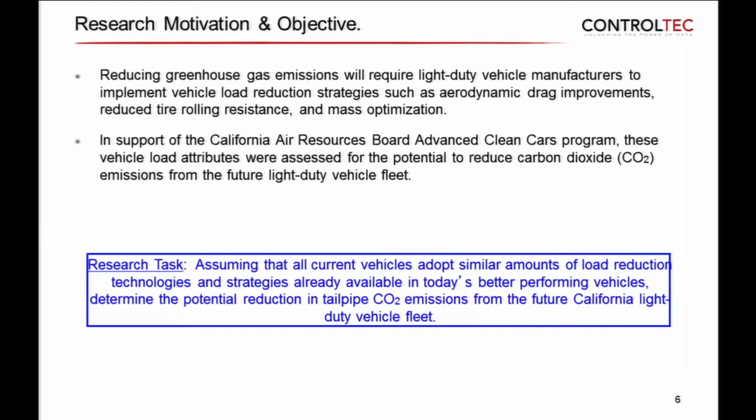Just want to touch on the scope, because this comes up a lot, what the scope is and is not. It is focused on 2014 model year light-duty vehicles to set the baseline. It is about aerodynamic drag, tire rolling resistance, and mass. We're focused on the EPA combined cycle, so that's 55 city, 45 highway, and it's an analytical study.

What it is not is we're not getting into powertrain technology with this research. We're not looking at alternate drive cycles, NEDC, which is the European, JC08, Japanese, and WLTC, for instance. We did not do any testing here. We evaluated test data, but did not actually do any tests, and it does not include a cost assessment.

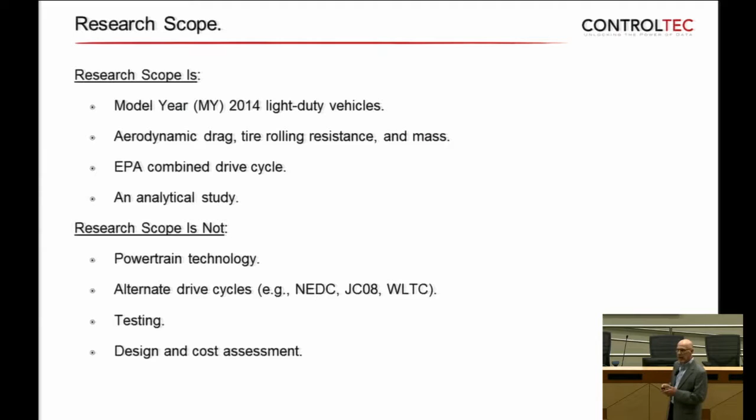So we're going to start out with a vehicle load primer, just to level set individuals on what we're talking about. When we look at vehicle load, or when we look at CO2 emissions, we look at it from an organizational viewpoint, where there's an organization that handles vehicle load, and there's an organization for energy conversion efficiency. Under the vehicle load elements, you have what we call road load, mass, and then drive cycles as part of that.

Under road load, aerodynamic drag, tire rolling resistance, brake and hub drag. And under mass, it's the weight of the vehicle plus inertia. And of course, drive cycles play an important part on the importance of vehicle load.

On the energy conversion efficiency side, that's really the powertrain elements, as most would call it. We're not going to talk about those today. We're going to talk about the items highlighted in green and orange.

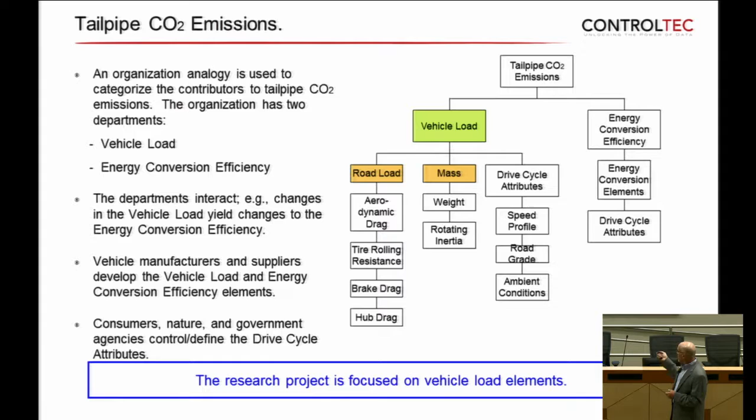This organization chart happens to be a way a lot of manufacturers also organize. You have vehicle energy folks that worry about aerodynamics, tires and aero, and you have the powertrain folks that worry about the energy conversion efficiency.

Drive cycles are defined by folks like some of you in the room, regulatory agencies, consumer, and of course nature, and that is a very important aspect of vehicle load.

Just to frame vehicle load and its importance, this chart shows all 1,300 vehicles, 2014, on the EPA cycle, fuel consumed as a function of tractive energy. So the best measure of vehicle load is tractive energy. And tractive energy is that combination of aero, mass, tire.

And you can see in this example, and this is true for every model year, about 70% of the variation in fuel consumption among all the vehicles that are sold new is due to vehicle load, variations in vehicle load. So along the x-axis...

Here is tractive energy, and I pointed out a couple cars here. This first car is a Mitsubishi Mirage, very small car if you're familiar with it, 3-cylinder engine. And then I'm going to go to the other end of the spectrum and look at a Lincoln Navigator. Very large vehicle, has a different function, handles more people, tows.

But what you see there is, if we look at the fuel consumption units there and compare the two vehicles, there's about a 3 times difference in fuel consumption. You go from about 1.5, in this case I'm looking at energy per mile, up to about 4.5. So it's about 3 times the fuel energy. The tractive energy on the x-axis here is also about 3 times.

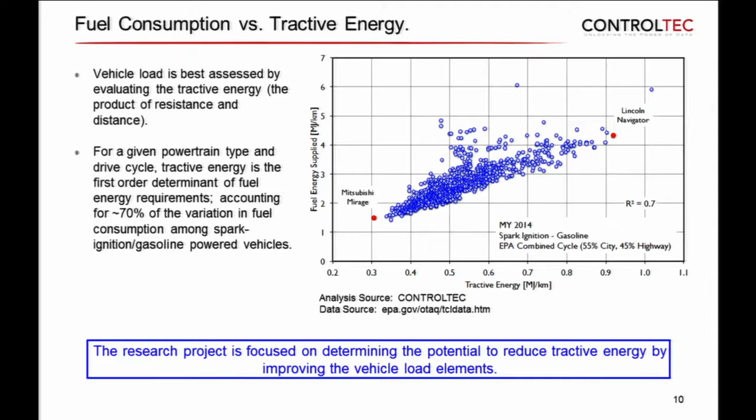Now, in this organization that we're talking with, we care about CO2. So CO2 is a simple conversion when we're talking about gasoline, not electric, for this example. It's a simple conversion of that y-axis on the previous chart, and now I'm putting it into grams per kilometer CO2.

Same trend here. The Mitsubishi Mirage is about 110 grams per kilometer in this example. The Lincoln Navigator is up around 320. 3 times the tractive load, 3 times the CO2, for the same efficiency.

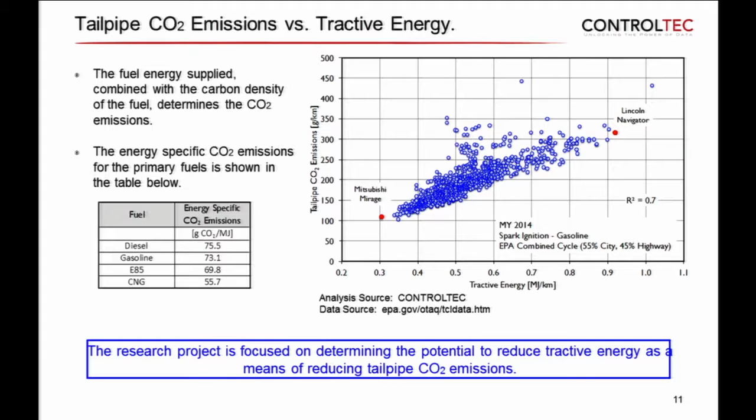Some may ask, what about the scatter here? Vertically, the scatter is due to efficiency. The difference between a car down here being very efficient and a car up here being inefficient, that difference in CO2 is due to the efficiency of the energy conversion elements. So we're looking specifically in this research at what is the impact of tractive energy, or vehicle load, on CO2 emissions.

Now the importance, as I said earlier, drive cycle is important in terms of its vehicle load impact and the elements themselves. So people say, how important is aerodynamics, or how important is mass, or how important is tire? It depends on how the car is driven.

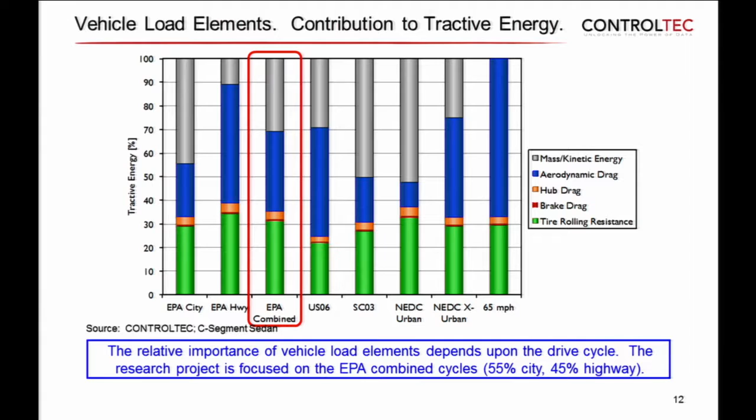We're going to be focused on everything we're going to talk about today. We're going to be focused on the EPA combined cycles.

So how important are these for what we're talking about today? We've analyzed lots of cars, done lots of analysis in the past, and the numbers we use across a wide range of vehicles would be: for the EPA combined cycle, a 10% reduction in mass would be a 5.6% reduction in tractive energy. A 10% reduction in aerodynamic drag would be a 3.6% reduction in tractive energy. And a 10% reduction in tire rolling resistance would be a 2.1% reduction.

So the point of this is you do not get a one-for-one impact on tractive energy. Meaning if I reduce my mass by 10%, I'm not going to get 10% better fuel economy. I'm going to get 5.6% or less, depending upon powertrain matching. And again, as I said earlier, mass impacts both tire rolling resistance and overcoming kinetic energy.

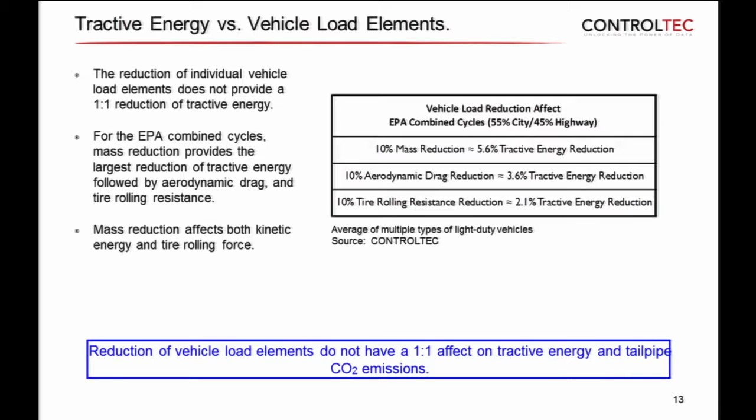So let's walk through the assessment of the model year 2014 vehicles. Again, the question from the ARB team was, what if everybody moves to the best in class? What's going to be the impact on CO2 and fuel consumption? So the first thing we have to do is figure out where everybody is.

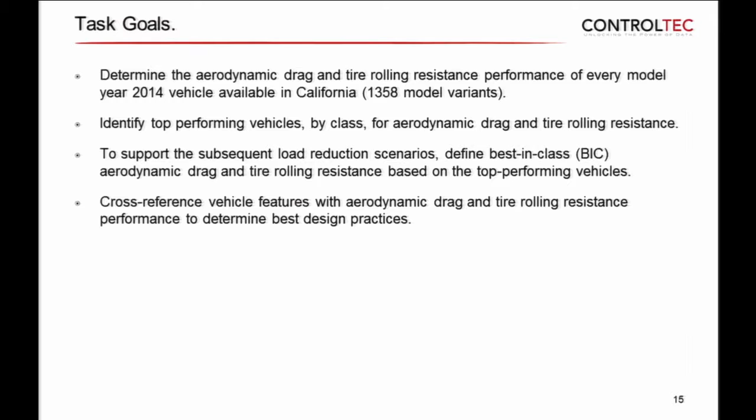So the task goal here, in this particular non-mass task, is to find out what levels of aerodynamic drag and tire rolling resistance every model year vehicle and every variant in the fleet has, which we counted up to 1,358 variants. So what is a variant?

This is very important to understand as we go forward. A variant is a body style powertrain combination. So if we think about a pickup truck, which is the most complex variant, most pickup trucks will have 3 cab sizes and 3 bed sizes, and most will have a 2-wheel drive and a 4-wheel drive, and most will have 1 or 2 or more engines in them.

So if I use an example of, say, a Chevrolet Silverado, by our count, Chevrolet Silverado is 52 variants. We needed to understand the aerodynamic drag and tire rolling resistance of all those. If you think about another car, a Ford Fiesta, it's a sedan and a hatchback - that's a different variant. So often if you go into the EPA database and look at the labels, there's fewer variants than 1,358 because labels are done collectively. Pickup trucks have a single label for a powertrain.

Once we figured out the aerodynamic drag and tire rolling resistance of every vehicle, we needed to identify top performers, and then define best in class, because best in class can have a broad definition.

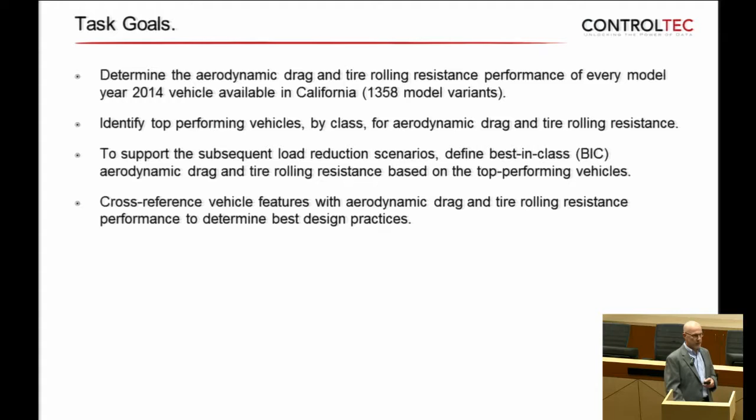For aerodynamic drag, the best measure of what we're talking about here is the coefficient of drag, or C sub D, and it was reported by about 47% of the manufacturers. So of the 1,358 variants, we had about 700 reported CD variants. And quite frankly, of those 700, some of them were the same value for a range of vehicles within that. So there might be a pickup truck that had multiple body styles, but there was one aerodynamic drag number. We knew that that's not technically correct.

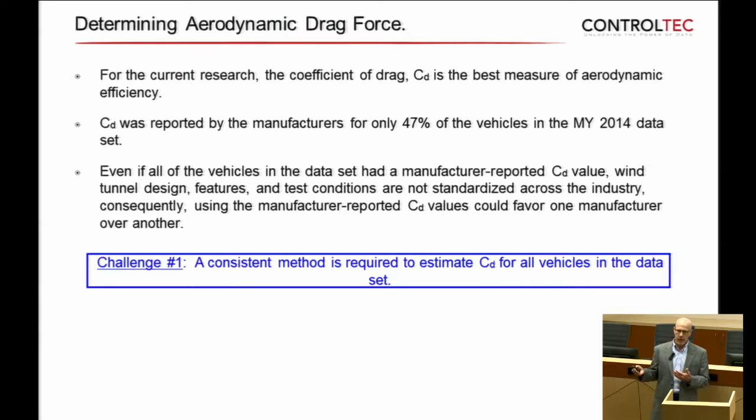But even if every manufacturer reported 100% of aerodynamic drag, test standards are not the same from wind tunnel to wind tunnel. Most aerodynamic drag numbers are measured in a static wind tunnel, and those will vary. There's enough technical papers out there to indicate that. So we had two problems here: we knew there's variation in the measurement, and we did not have measurements for every vehicle. So challenge number one for this research was to find a consistent method to estimate the coefficient of drag for all the vehicles in the data set.

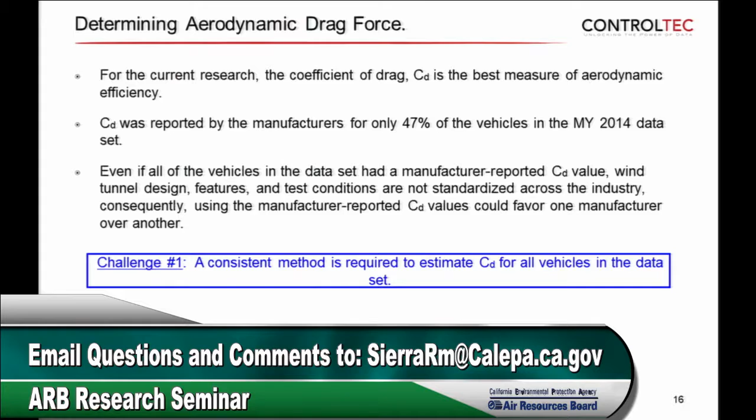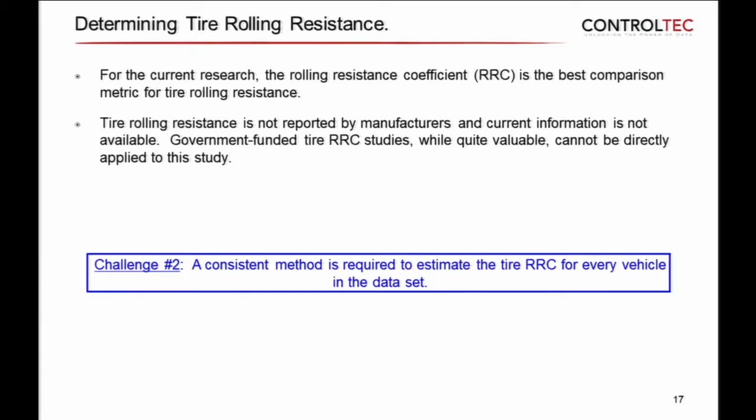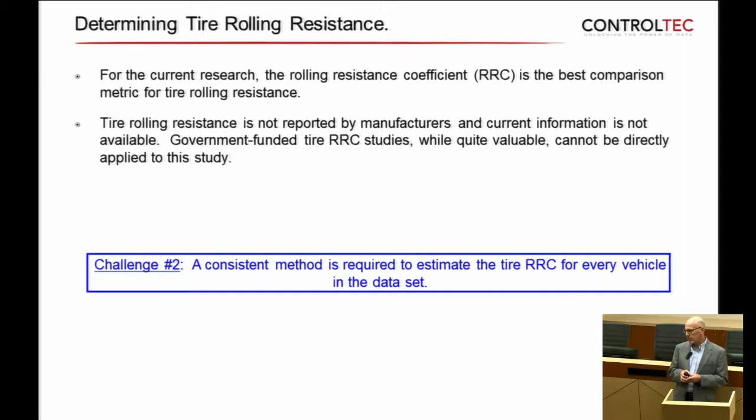Next came tire rolling resistance, and RRC, or the rolling resistance coefficient, which is a common value used in industry, is, we felt, the best comparison in this case. Tire rolling resistance as a numeric value is not reported by the manufacturers, nor could we find much information in literature from the tire manufacturers themselves. So very little information on tire that we could find to support this. There are some government funded programs from a few years back. We'll go through that. But our challenge number two here was to find a consistent method of measuring, or estimating, tire rolling resistance for each of the vehicles in the data set. So how did we do that?

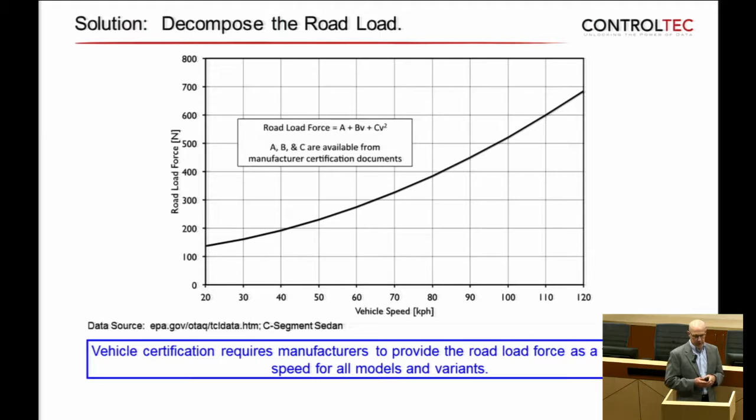So we took this method, decomposed 1,358 vehicles down, and now we'll walk through the results of these.

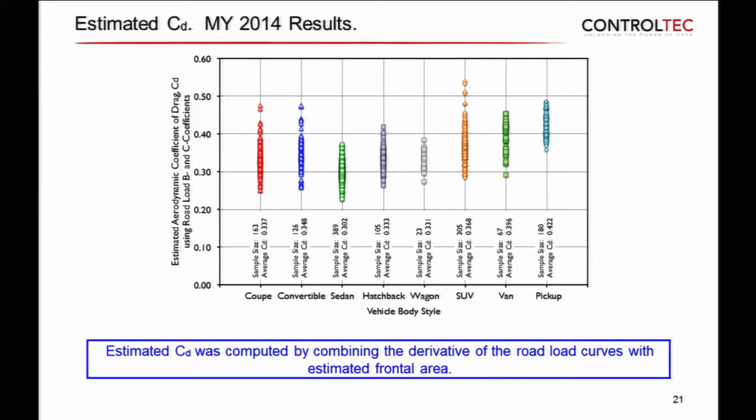Things followed trends. Over here on the coupe and convertible, you see those ones sticking out. Those tend to be the performance vehicles. Performance vehicles, if they don't use an active device, need something to pull the car down to the road at high speed to avoid lift. Those are often detrimental to the coefficient of drag.

So as we went through this and vetted out this information, it all followed well. I don't show it here, but it is in the report. We did correlate it against the 47% of vehicles that reported.

I should say this method measures what we would call the dynamic CD. Most vehicles, when measured for drag in a wind tunnel, it's static, meaning the tires are not turning and the road is not moving. There are wind tunnels in the world that have moving roads and spinning tires, but most do not. So what we're analyzing here, because we're decomposing it from a road load, which is theoretically from a coast down, which has moving road and rotating tires, will have a higher CD on average, and that's what we saw.

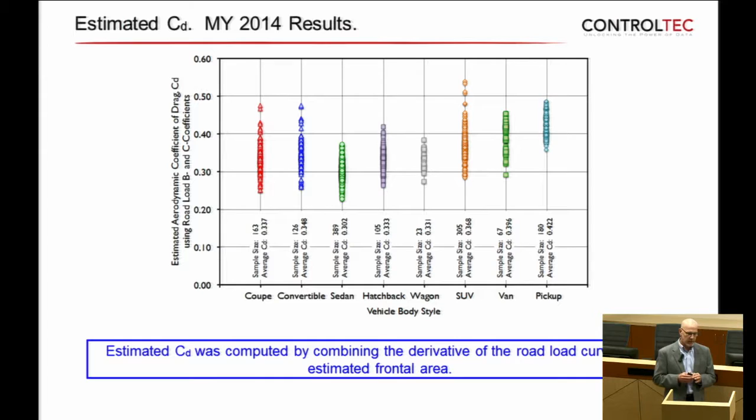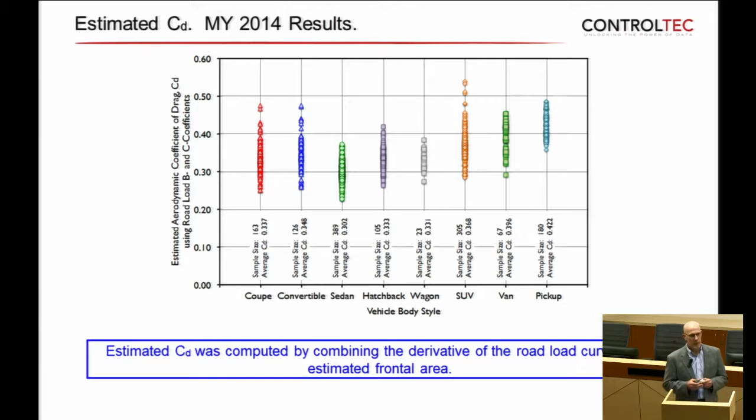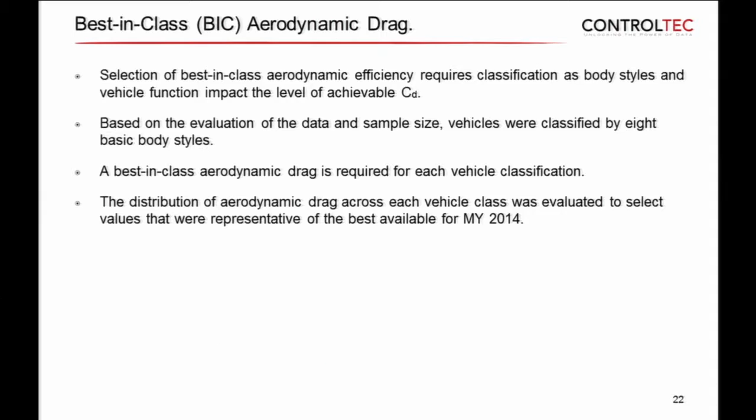So to satisfy this research, we had to select best-in-class aerodynamics. We knew, as you can see from that previous slide, that aerodynamic drag is variable by body style, so minimally we had to have a classification that recognized that. We didn't want to come to the end of the research and say that a pickup truck has to have the same aerodynamic drag as a sedan, because we knew that's not plausible or logical. So we did want to classify these to identify best in class.

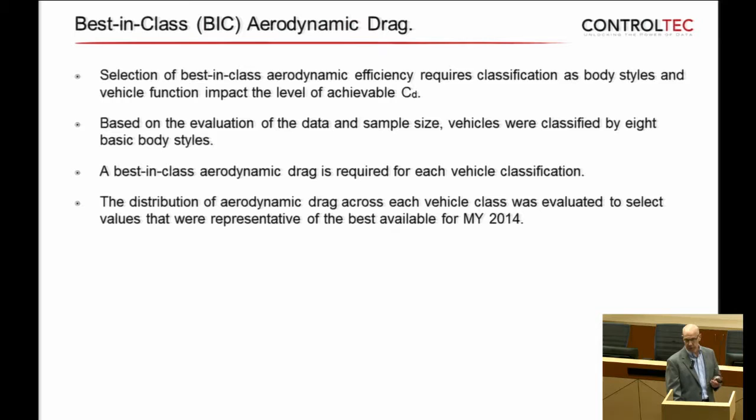We looked at sample sizes, we looked at a lot of data, we looked at distributions, and we came up with 8 different body style classifications to put each vehicle into a class and then define the best in that class. We looked at distributions across each of those and made our evaluations and proposals, presented those to the ARB Air Resources Board team, vetted back and forth a bit, and in recognition of the body style variance and measurement and analysis variability inherent in this, we defined best in class as the 90th percentile.

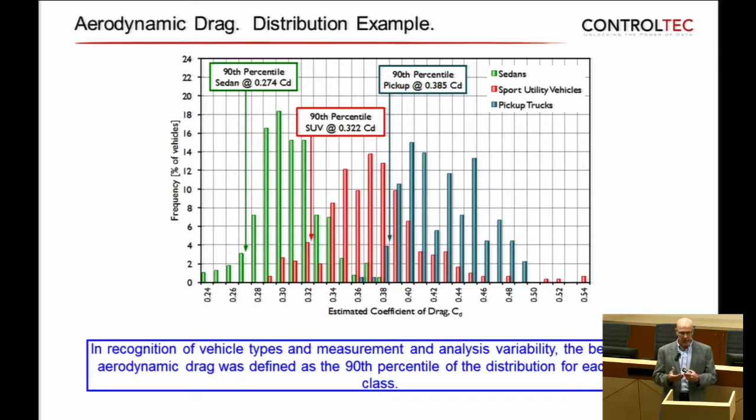SUVs varied, as I said earlier, the widest variation from just around 0.33 CD all the way up to near 0.55. The 90th percentile there being 0.322 by our measure. And the pickup trucks are more narrow because they're more common with each other, about 0.385 is best in class by our measure.

So 90th percentile is the definition of best in class. Going back to what we were going to talk about earlier, we're moving everybody eventually, once we get down to this scenario, to move all these cars that are not best in class to best in class. So these vehicles out here would move down to that level. Vehicles that are better than best in class for the final load scenario, we left them there. They were already best in class or better. We did not want to, and that's the team, the ARB team and ourselves, task a best-in-class vehicle with getting even better.

Just bring the industry up.

So these are the final results of our analysis of the 8 classifications: coupe, convertible, sedan, hatch and wagon. We lumped hatch and wagon together for a couple of reasons. When we looked at the data and the distributions, there wasn't a significant separation in aerodynamic drag for hatch and wagon, and the wagon segment is pretty small, less than 20 vehicles. So we lumped those together.

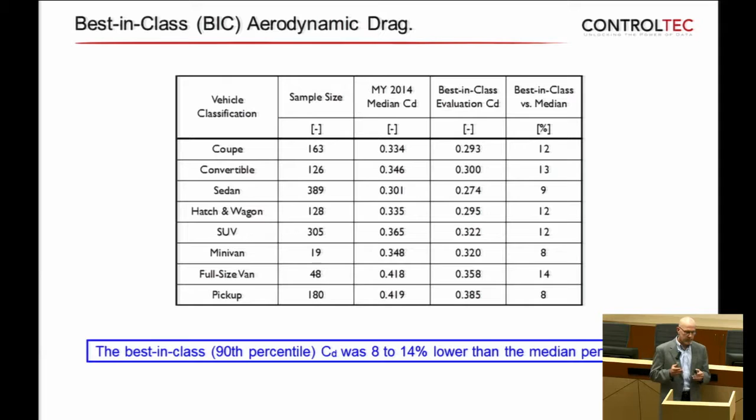Overall, what we're seeing here from an aerodynamic drag standpoint, relative to the median shown in the middle column, is an 8 to 14% reduction from median today to best in class today, depending upon the class of vehicle. So remember that number when we get down to the load scenarios.

So let's go to tire rolling resistance next. I'm going to jump right to the result. This is the distribution of tire rolling resistance that we found after looking at the 1,358 vehicles. We have tire RRC - the units there are kilograms per 1,000 kilograms, or in English units, pound force per 1,000 pound force. We're seeing anywhere from about low 6s, high 5s, out to about 16 RRC.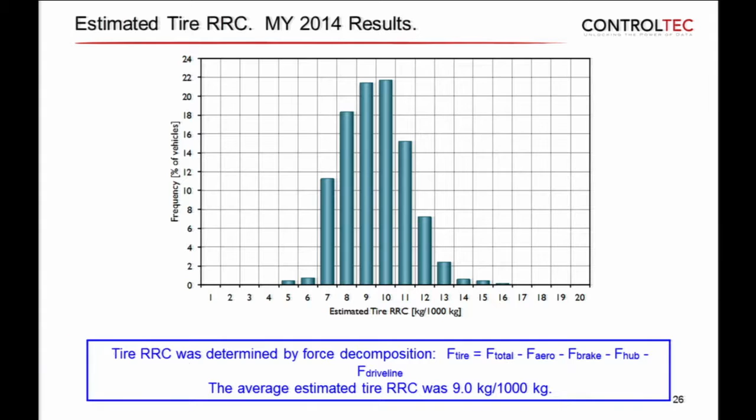Now, unlike aerodynamics, we did not have a baseline to compare to, because in aerodynamics the CD is reported by manufacturers, so at least we had a reference point. In the case of tires, we had no reference point because it is not reported in the literature. We did go back to look at how our distribution compares to a study of original equipment tires - we had to go back to 2009. As part of some studies, the Rubber Manufacturers Association put together a series of about 400 to 500 original equipment tires, and their distribution is plotted in green against our distribution in blue.

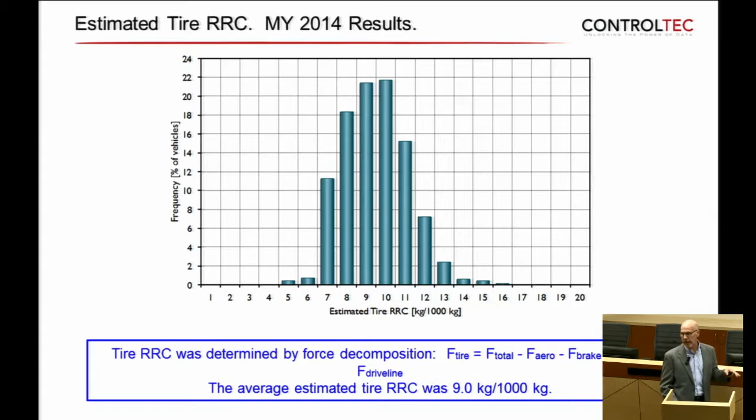So there are differences, but we are close on average. Our average in the 2014 fleet is 9 kilograms per 1,000 kilograms. The RMA data was at 9.2 kilograms per 1,000 kilograms. There are some differences in the distribution - we are estimating more activity down in the 7 and 8 RRC range, and more activity out in the high RRC range, although the median of the two distributions is very close.

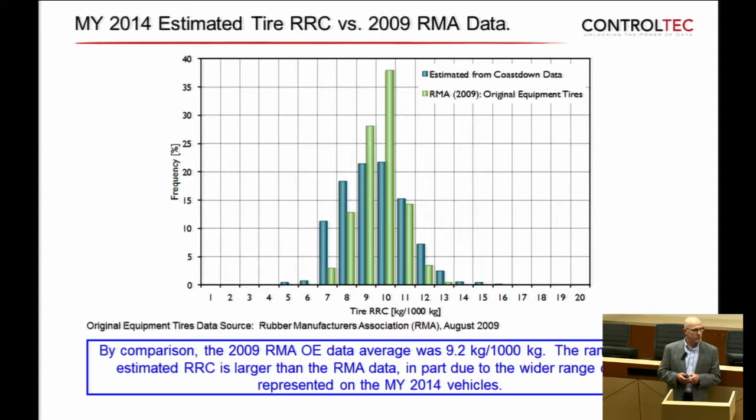Why would we expect to see that? A couple things: that data from RMA is 6, maybe 7 years old now. We don't know what has happened with tire rolling resistance in that time. The RMA data may have been off new tires rather than run-in tires, which is part of the coast down procedure. And the tire size, wheel size, and tire width of the RMA data was much narrower than in 2014 - a lot more tire variety in the blue set versus the green set. But by comparing it against the RMA data, we at least got some comfort that our analysis methodology was consistent with what has been measured in the past.

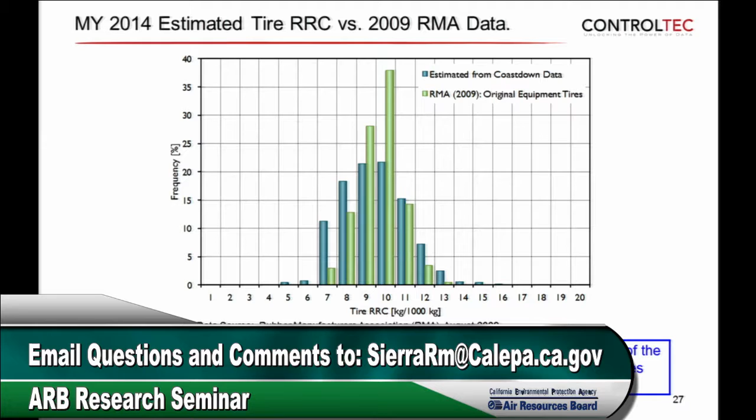So again, as with aerodynamic drag, we needed to understand best in class. But just like with aerodynamic drag, we know tires have other things they have to do. We have to be cognizant of wear, braking, wet traction, noise, other things. So we evaluated, based on some vehicle classifications, different categorizations of tires. We came down to 3 categorizations of tires.

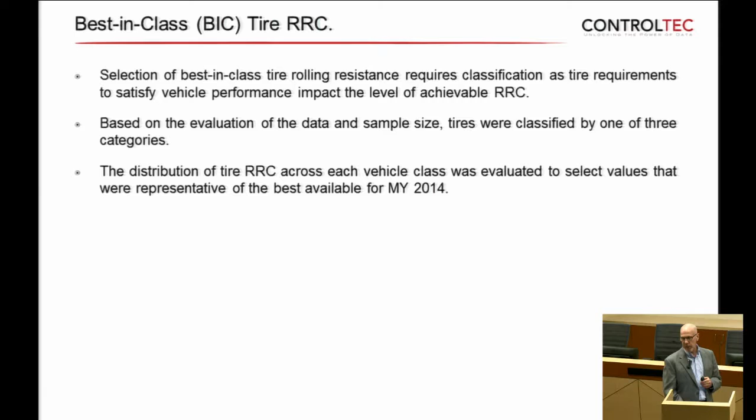So let me explain each of these classes. If a vehicle was specifically a fuel economy oriented vehicle, or it was the fuel economy oriented model within a vehicle, it got binned into the fuel economy class. And that doesn't have to only be small sedans like Toyota Priuses - the Silverado XFE, a fuel economy version of that truck, can go into that class. Or if the manufacturer specifically said in their write-up that it was a fuel economy tire on the vehicle, we put it into that class.

For the performance class, it was really if it was a performance-oriented car, and we classified those tires, or those vehicles, into the tire classification of performance. Those are all the vehicles that we would expect - the performance cars from Europe, the performance versions of cars, SRT for Chrysler, Corvette for GM, those kinds of cars that we would all agree are performance cars, got binned into the red.

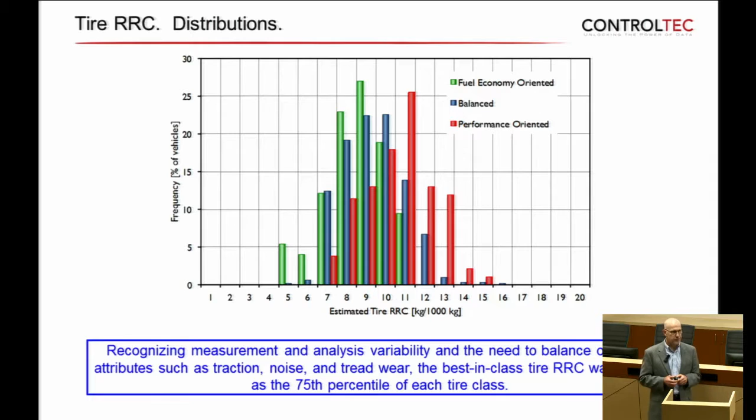So as with aerodynamics, when we get to the end, if we had the car in the fuel economy class, its tires would get moved to 7.4. If it was already at a 6, its tires are not going to get moved. So we're moving all the tires above 7.4 in the fuel economy class to that value. Balance is 7.7, performance is 8.9. Overall, compared to the median, we're 11 to 14% lower rolling resistance for a best-in-class tire versus a median tire.

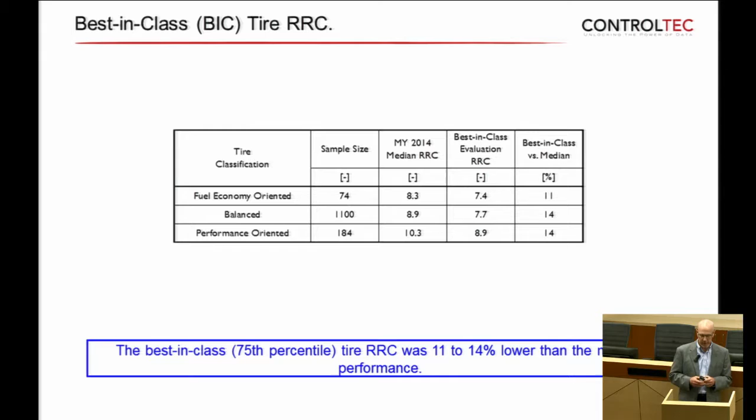So that's aerodynamics and tire rolling resistance. Now we have to get into mass. Mass is difficult.

So the task from the ARB team was to generate a metric for mass, to quantify mass efficiency. And then once we quantified that, determine the mass efficiency of the 1,358 vehicles, identify the top vehicles, just like we did with aero and tire, and then again define that best in class. Because we're not always saying, as with tire and aero, the best in class is the absolute lowest value - it's a logical value that we believe is plausible and probably achievable.

And then cross-reference that with vehicle features. The last point was part of the literature review, and relative to the literature review, some manufacturers report a lot of information on mass and mass usage. Other manufacturers don't report anything. So that part was certainly somewhat difficult.

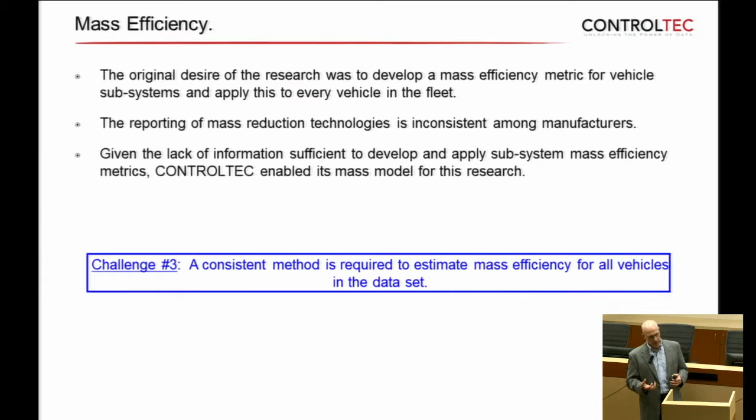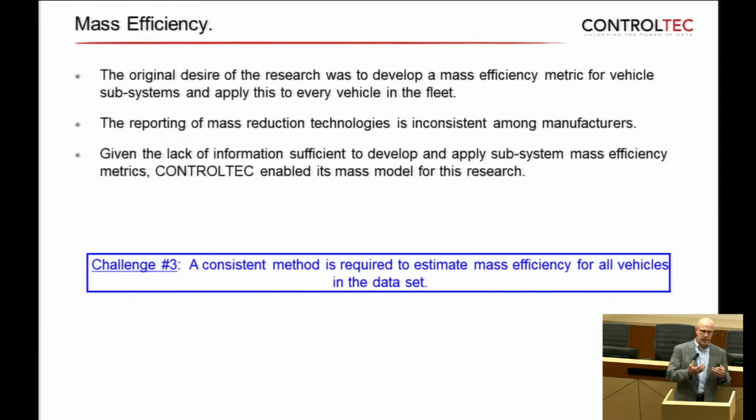So the original desire was to look at the subsystems of the vehicle, body in white, powertrain, and try to do some kind of substitution analysis where we pull off an all-steel body in white and put on aluminum, or take off a steel door and put on an aluminum door. There was not enough consistent information out there to do that, so we had to come up with another method. Given that lack of information, we already had a mass efficiency model developed that we had done for some of our other work, so we leveraged that mass model.

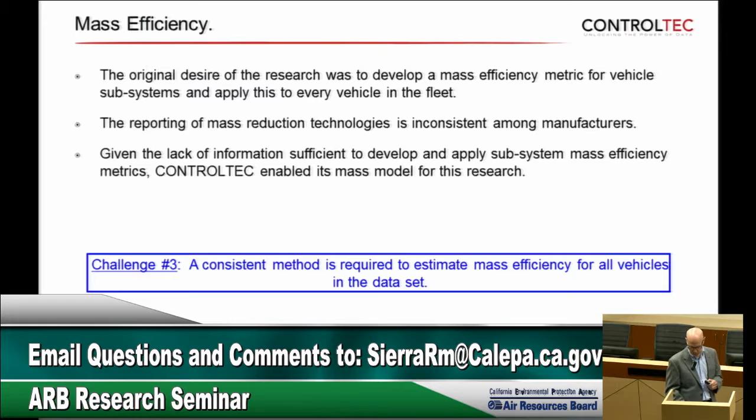So let's talk about that mass model a little bit. It's a light-duty mass model that we've assembled over the last 4 years or so. We use it to identify vehicles that have good mass efficiency or vehicles that have opportunity for mass reduction.

We use publicly available information, because if you've got to populate this and check out a vehicle, and there's 1,300 of them, you have to really rely on the public information from the manufacturer.

The model is a combination of continuous and discrete elements, and it's assembled like the car itself. There's the base vehicle portion that takes into account the length, width, height, cargo bed, wheel size. There's the powertrain portion that takes into account what type of engine it is, spark ignition, compression ignition, is it turbo, non-turbo, supercharged? If it's a hybrid, what kind of hybrid is it? What's the size of the motor if it's a hybrid?

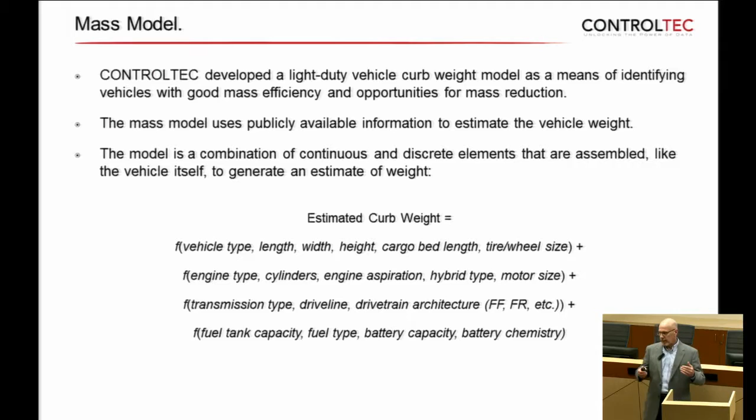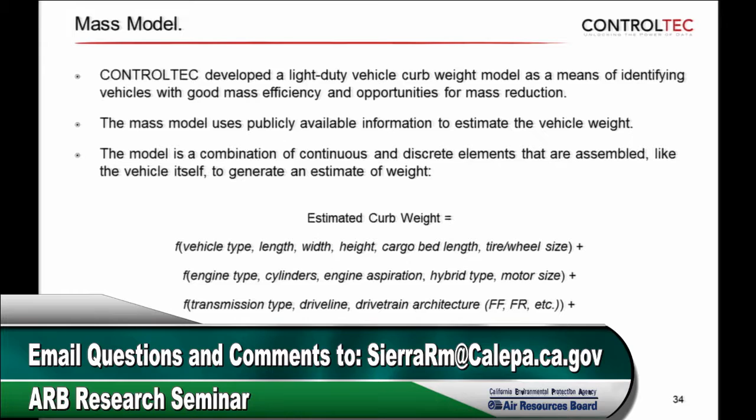Also then the next discrete element is the transmission and driveline. What's the transmission type? What driveline? What's the driveline architecture? And then finally the onboard energy storage element, which is fuel capacity, fuel type, battery capacity, and battery chemistry. So we take the publicly available information, load it in the model, and it projects a weight for that vehicle.

So the output of that model I'm showing here is the estimated curb weight against the manufacturer reported curb weight. We're about a 95 R-squared, so we account for 95% of the variation in the fleet. But we do see variation, obviously. And that variation is things we didn't put in the model, things we don't know about.

We don't know precisely the material usage on all components of the vehicle. We don't know precisely the option level. So we can start to look at these residuals as a proxy for mass efficiency. So as an example...

I don't know what car that is, but our mass model projected that it was 2,000 kilograms. The car itself was 1,800 kilograms. So to us, the unknowns, which are material usage and option, are part of that mass efficiency. So we would say that that's a mass efficient car.

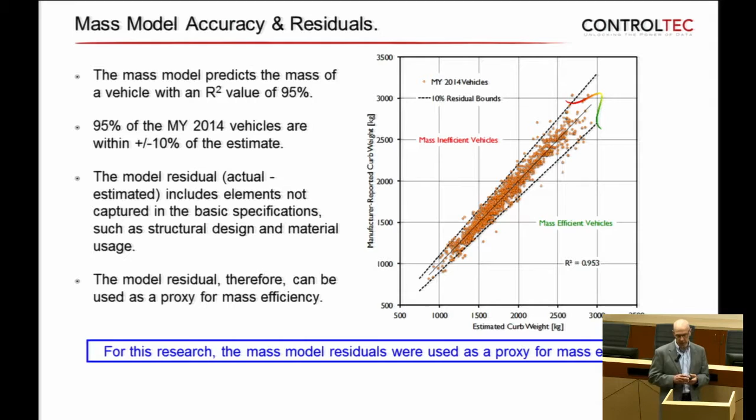If you go on the other end of the spectrum, a car up here, our mass model projected 2,200 kilograms, but the manufacturer said it weighed 2,700 kilograms. So we would say there's something about that car. We've accounted for all the things in that car. We've counted how big it is, the tire size, the engines, it was a hybrid, the mass of the motor and the battery, and it's still 500 kilograms heavier. So there's a mass efficiency element.

So that's what we use the proxy for this study, is the residuals out of the model. The residuals are accounting for everything we know about that car, the unknowns, material use, and option. So there's a distribution around here from mass inefficient to mass efficient vehicles. And we want to look at that distribution.

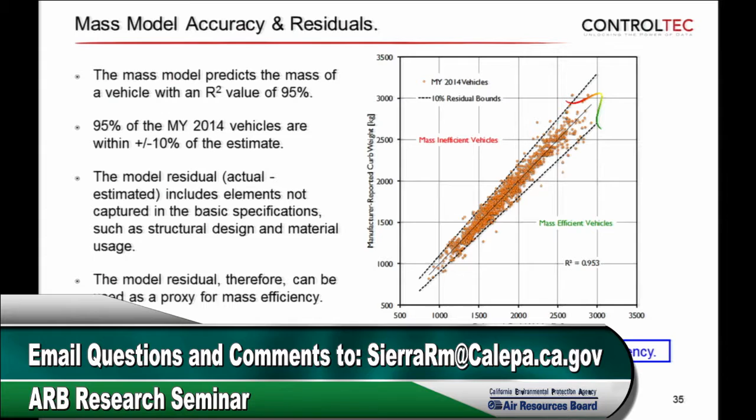We want to see what that looks like, and study vehicles on either side of that. So if I cut across here, basically look at that distribution, this is what that distribution looks like for the 2014 vehicles. So I have this residual, and this would be percent mass above or below. Don't worry about the numbers so much. Anything to the right is going to be less mass efficient, going to the left, more mass efficient. The zero value here really represents what is typical in the fleet today.

So what is typical in the fleet today? Leveraging our literature survey, typical in the fleet is, if we start with the body, it's typical as a steel body. We don't know the percentage of high-strength steel, but we know it's typical as steel body. Closures, doors, hoods - there's a fair number of high-volume vehicles with aluminum closures, fair number of high-volume vehicles with composite lift gates, things like that. So body, steel, closures, some alternative material.

Powertrains tend to be almost all aluminum, at least the blocks and the heads of the engines and the transmission cases. Internals of those remain steel in terms of gears and things like that. Suspension components are typically aluminum now. There's a lot of aluminum use. And so that would be the zero. So as you go to the left, to calibrate ourselves, we want to look at some vehicles that have done something with mass that we know about.

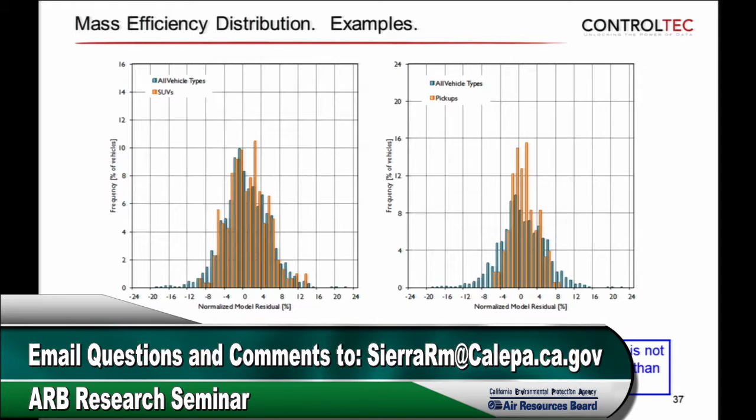So I'm showing here on the left chart all vehicles against just SUVs. You see the distribution is very similar, SUV to all vehicles. On the right, I show pickup trucks to all vehicles. Now pickup trucks, in this case in 2014, have a much narrower distribution, centered around 0 but narrow. That's because it's a very homogeneous group of vehicles in 2014, all primarily steel, basically what I described earlier, steel type vehicles, aluminum closures, aluminum powertrain parts.

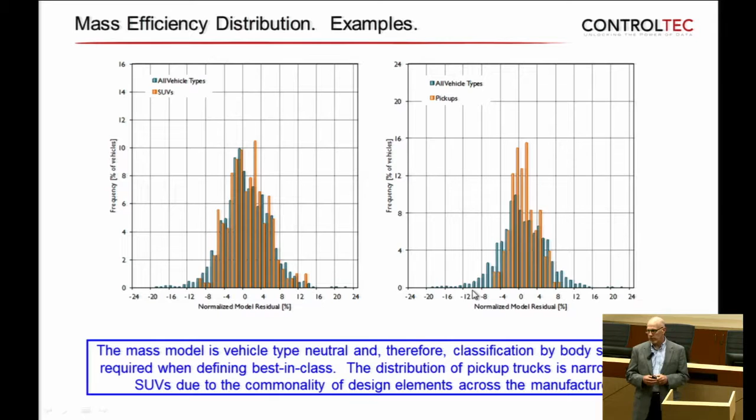The F-150 is not in here for 2015, but just as a reminder, it moves it down to that 11% - that's where the F-150 would be against pickup trucks. So again, we felt that the model itself is vehicle type neutral. It's just that pickup trucks are narrower because they are more homogeneous as a group.

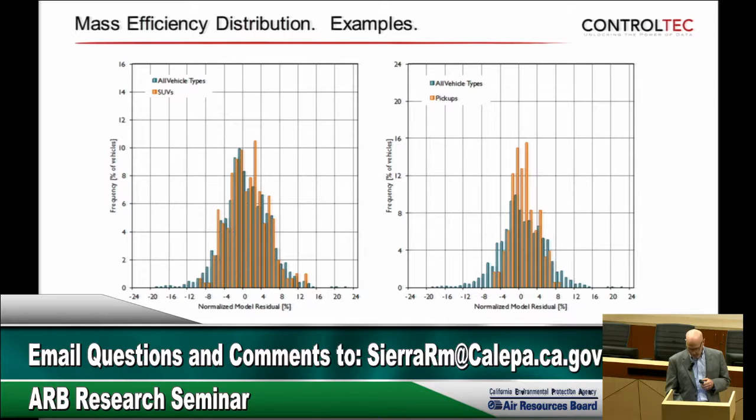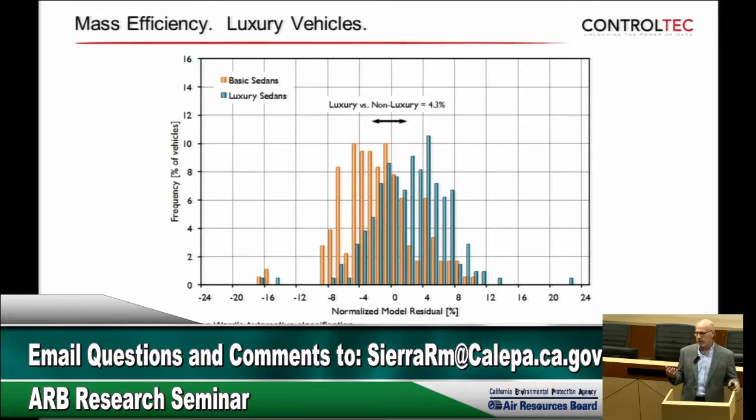Option level was something else we were aware of and can't control, but we did want to look at luxury versus non-luxury. A luxury vehicle in general has a base that's much more heavily optioned than a base vehicle that's non-luxury. Certainly you can option a non-luxury vehicle to have everything, but reported masses are typically on base weights. When we broke apart the vehicle data set by luxury versus non-luxury, in this case showing sedans because it's the largest set, we saw about a 4.3% separation. This also aligned with where some manufacturers report base mass and fully loaded mass, and it tends to be 3 to 4%.

So luxury vehicles, by the definition we used, Ward's Automotive helped classify these vehicles as luxury or not, and it's about a 4% difference. We used that across all luxury vehicles, not just sedans.

So in the end, we had to select best in class mass efficiency, with neutrality of the model as I said. We went with non-luxury and luxury categorization, looked at the distributions, and recognized variability. In the mass world there's less variability, since weight is easier to measure. So we're going from tires, where there's no information, to mass, where there's a lot of information, at least the weight of the vehicles. So our certainty is getting better.

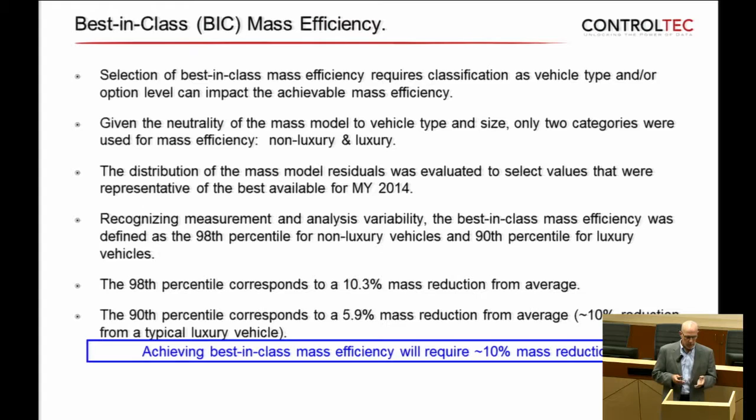So for that, we picked the 98th percentile for non-luxury vehicles, which is a 10.3% mass reduction. Now, think about what I just said about the Ford F-150 - it'd be an 11 on this, so we're saying 10.3. This is not an insignificant amount of mass if you look at it from a program level.

For luxury vehicles, we accounted for that 4.3%, and we set them at 90% of the entire group. So it's still about a 10% reduction, but it's a 10% reduction from a class of vehicles starting out 4% heavier. So to achieve best-in-class mass efficiency, it would be a 10% mass reduction overall. But it's not a 10% mass reduction on every car in the fleet. Some cars get a 20% mass reduction, others get no mass reduction. So a car sitting at 12% residual is going to get a 22% mass reduction when we run the analysis, which we'll talk about.

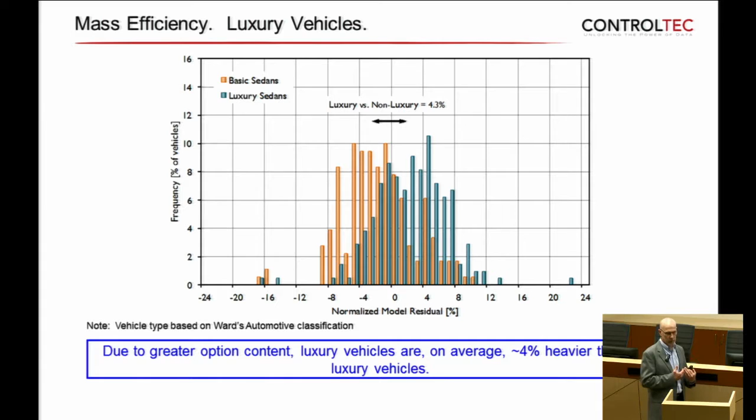So what were our load scenarios? At this point, we've estimated aerodynamic drag, CD, for all 1,358 variants. We've estimated tire rolling resistance for all 1,358 variants. And we have a mass efficiency value for all 1,358 variants.

We've defined best in class as the 75th percentile for tires, 90th percentile for aero, and 98th percentile for mass, or 90th if it's a luxury vehicle. Understand a vehicle could be a luxury vehicle with balanced tires in a sedan class, or a luxury vehicle with performance tires in an SUV class. So the vehicle won't be classed the same in every one of these classes—it depends on what it is.

The first thing we did is run the baseline. At this point we're in simulation mode. We ran the baseline scenario, then took every car and moved it to best in class aero, or if it was already better than best in class, it didn't move. Next we moved every car to best in class tire rolling resistance, again leaving it alone if already below best in class. Then we added mass efficiency on top of that—light-weighting every car heavier than best in class, and leaving the weight alone for every car better than best in class.

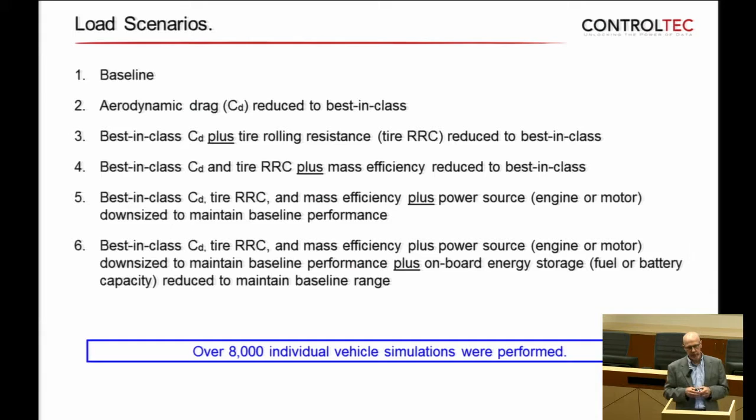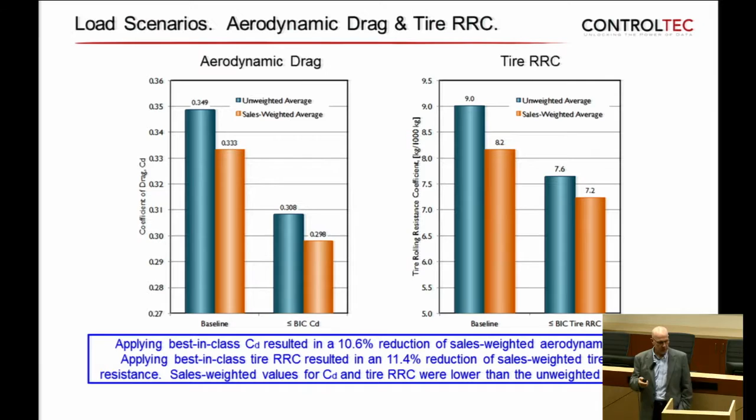So we saw an overall reduction of 10.6% in Cd. That's a sales-weighted reduction. Remember earlier I said, depending upon the vehicle, it was 8 to 14% reduction—so it makes sense, we're right in the middle there. For tire rolling resistance, that's the graph on the right. We went from a 9 RRC, or a sales-weighted 8.2 RRC, down to a sales-weighted 7.2 RRC—about an 11% reduction overall. Again, in that class, RRC was 11 to 14% reduction.

Curb weight went from a sales-weighted weight at 1633 kilograms down to 1505, so about 7.8% sales-weighted curb weight reduction. The equivalent test weight is what's important here because that is how the cars are tested.

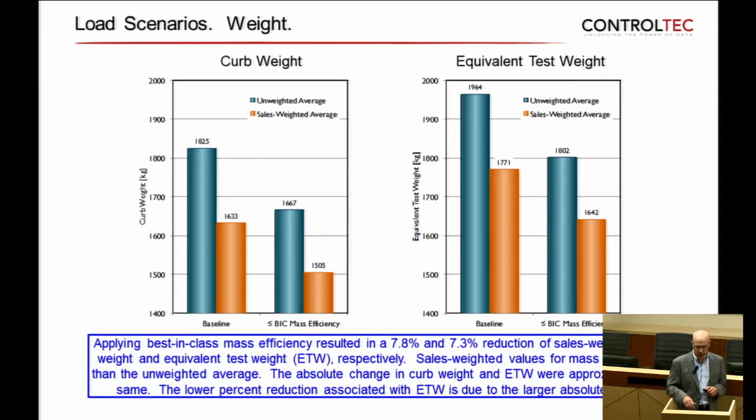Went from 1771 kilograms down to 1642 kilograms, a 7.3% reduction on an ETW basis. Each car falls into a weight class, and that's how it's tested. The difference between those two numbers, 7.8 versus 7.3, is just the baseline number being higher in the case of the test weight class.

As I said very early in the presentation, tire rolling force is a function of the coefficient plus the weight on the vehicle. So when we take rolling resistance coefficient down and we take the weight down, we're taking the whole force down of the tire. The combination of the lower mass and the lower RRC gives about an 18% reduction in tire rolling resistance, or tire rolling force.

We look at the total road load force. This is that curve that I showed earlier in the presentation. We take it down about 12%. So the non-mass side of this is being reduced by about 12%. That's what happened to each of the elements when we moved everything to best in class—that's what happened to the sales-weighted figures.

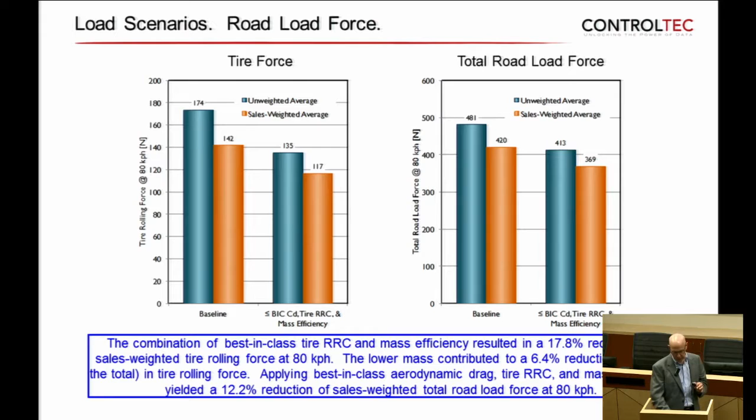So what happened then? What does that mean from a fuel economy and CO2 standpoint?

The first thing we want to look at is what happened to the energy. Now I'm going to change terminology on you—we call it vehicle energy intensity. That is the tractive energy, the amount of energy it took to move that vehicle through the cycle. It's a measure of what's happening when we take out the loads of aero, tire, and mass and put it into a single number: total tractive energy divided by distance. So we went from 486 down to 436, an 11% reduction in tractive energy.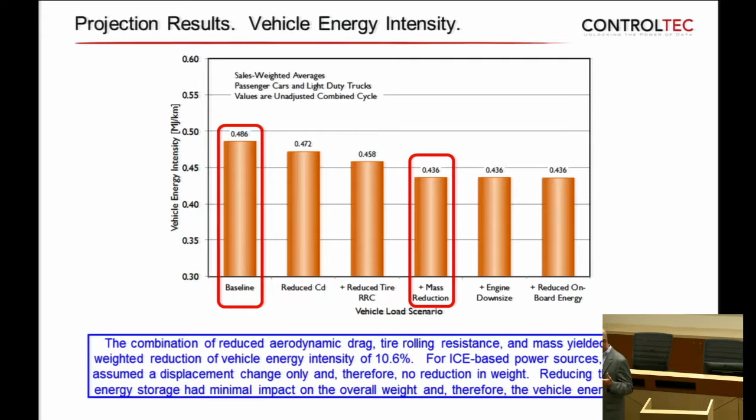Now, when we downsized the engine, we only changed displacement. We did not change what the engine was, so we did not assume a mass change with that downsizing—the engine stayed the same, the energy stayed the same. And when we took off the onboard energy storage, the change in mass was small enough that the change in energy shows up only in the fourth digit. When you take 2 or 3 gallons out of fuel, that's 18 pounds—it's not showing up in our analysis as significant. And for the electric vehicles that may have had a mass change, there are so few of them in the fleet now that the sales-weighted figure doesn't show up significantly.

So that's what happened to energy when we went through the projections, and this is vehicle energy.

But let's now talk about fuel consumption and CO2 emissions. The first thing we wanted to do is check our projections against what was reported. If we took reported fuel economies and reported CO2 for every vehicle, those are the blue bars, unweighted and sales-weighted—let's focus on sales-weighted here. If we took the reported values for every vehicle, we would get 2.964 gallons per 100 miles. Our projections of all those vehicles would be 3.003, so a percent or so different. And in the CO2 world, we ended up with the same projections for the sales-weighted figures.

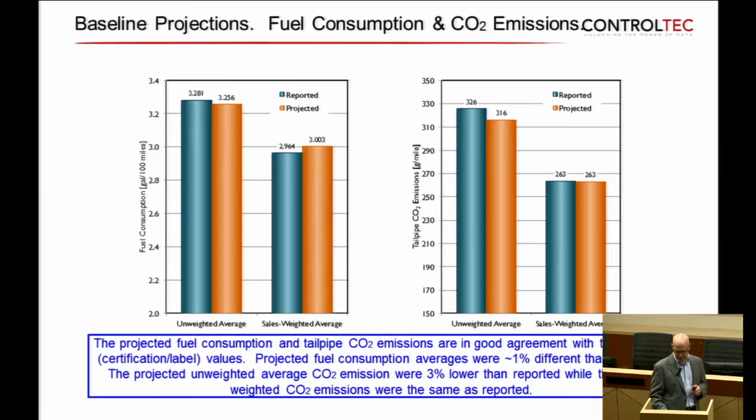Now, we should never expect a perfect match—it's by chance we're matching here—because out of 1,358 vehicles, not every vehicle has a reported unique fuel economy or CO2 value. A manufacturer will report a value available in the public record, say for a pickup truck, but that reported value may cover a wide range of pickup trucks. We're actually modeling the wide range, although the blue bar might show only one value covering all those cabs and beds. But we walked away from this confirming we're projecting quite closely what the fleet is coming out at. So let's look at the end results, starting with energy conversion efficiency.

Earlier in the presentation, I talked about the two organizations and how they interact. Well, this is the first interaction. Any mechanical device, any energy conversion device - electric motor, engine, transmission - if I take the load off of it, it's going to become less efficient because there's an underlying parasitic loss that remains constant.

So what happens when you take the load off of a vehicle? The total energy conversion baseline is 21.9% efficient, meaning 21.9% of the fuel energy that went in actually went to move the vehicle through the cycle. The remaining 78% heated up the world. As we took the load off these vehicles, we dropped down to 21.1% efficiency. This is what we would expect. But it's one reason the downsizing trend is going the way it is, because I'm making that engine work harder, and it's going to be more efficient when it does that.

By the way, in the downsizing and lightweighting literature, you often see a claim of a compounding effect, where I can take the mass out of the vehicle and get a benefit, and then downsize the engine too because I have less mass, getting an additional benefit. The reality is you have to downsize the engine to get the benefit, so it's not a compounding effect, it's just a necessity of rematching the powertrain. So there's a little bit of double dipping that goes on often when you read the literature. But this is what really happens.

Now, when we downsize the engine itself, we gain back some of the efficiency. And we were asked, though it's beyond the scope of the study, can you get it all the way back? The short answer is yes, but again, it's beyond the scope of the study. You'd have to get into shift schedules and final drive ratios and things like that to re-optimize that powertrain for that new lighter load. But certainly just downsizing the engine will get you back a significant portion of that.

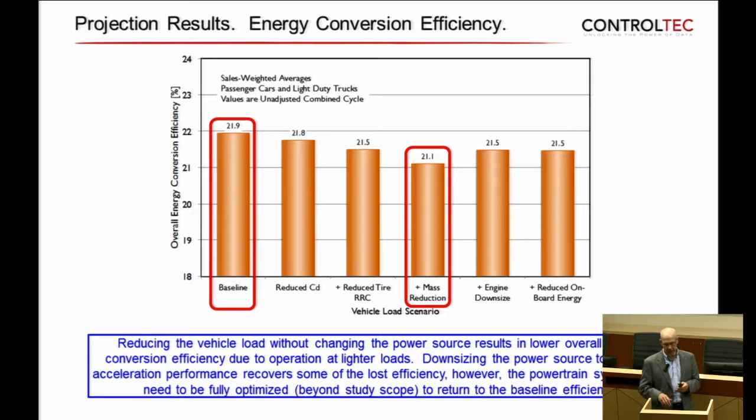So now I've reduced the tractive load. At least initially I hurt the efficiency, but I got some of it back. So what does that mean from a fuel economy standpoint?

Baseline of these vehicles went from 33.3. By the time I re-downsized everything and took out the tractive load, we went up to 36.3 miles per gallon. We gained 3 miles per gallon by moving the entire fleet to best-in-class aero, tire, and mass. So it's a 9.1% benefit. We can get more than that if we could optimize back to the 21.9% efficiency. We'll talk about that later.

Now again, just to be clear, some cars might have moved no miles per gallon because they were already best-in-class aero, tire, and mass. Some cars may have moved 8 or 9 miles per gallon because they were heavy and had poor aerodynamics. But the fleet moved 3 miles per gallon.

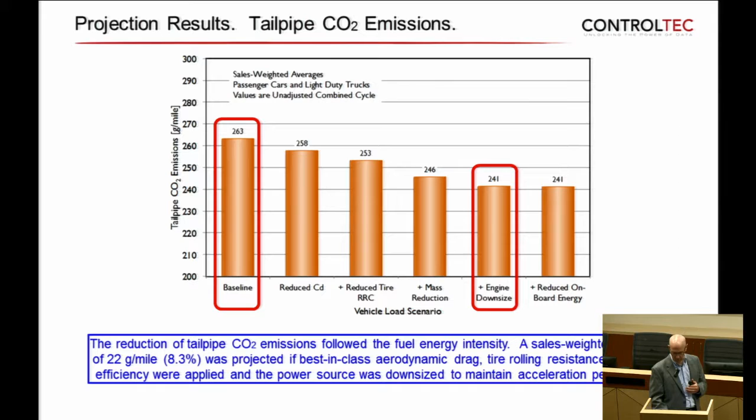If we take that and convert it to CO2, we're moving from 263 grams per mile down to 241 grams per mile, for an overall reduction in CO2 of 8.3%. Now that's 8.3%, dropping the tractive load to best in class and taking the engine displacement down to rematch the performance, but it is not rematching to get back to the original efficiency of 21.9. Again, reducing the onboard energy storage did not make a significant change because the tractive energy did not significantly change.

So a lot of words here, I'll summarize some of this up. Reduction in aerodynamic drag: 3.3% lower vehicle energy, 5 grams per mile, fleet weighted in the current California fleet. That's aerodynamic drag. Tire rolling resistance is an additional 2.9%, about 5 grams per mile. So aero and tire by itself would be a 10-gram benefit, plausibly.

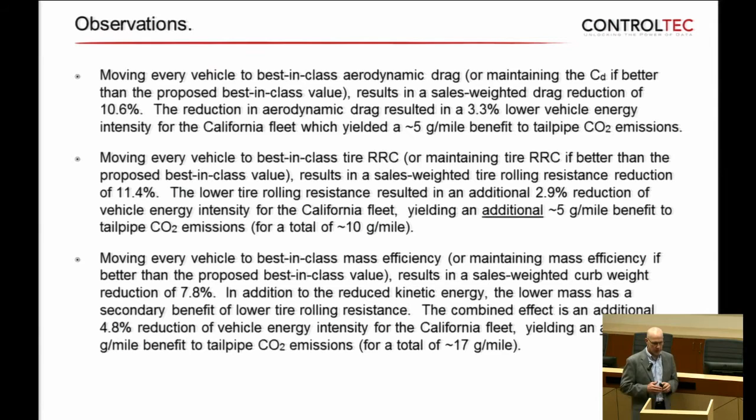Going to best in class mass efficiency, another 4.8% reduction in vehicle energy, to a total of 17 grams. Then if we resize the powertrain, we get an additional benefit of 5 grams, so now we're at 22 grams per mile. So that's taking everything to best-in-class aero, tire, mass, and downsizing the powertrain to at least maintain performance.

Now, as we said before, to recover the full efficiency, getting from 21.5% back up to the 21.9%, 22% efficiency, there would have to be more done to the powertrain from an optimization standpoint, mainly in control and some hardware. If we could take it up to 22%, back to the baseline efficiency, we're not taking the efficiency beyond where it was, we're bringing it back up to where it was, we would get another 5 grams out for a total of 27 grams per mile.

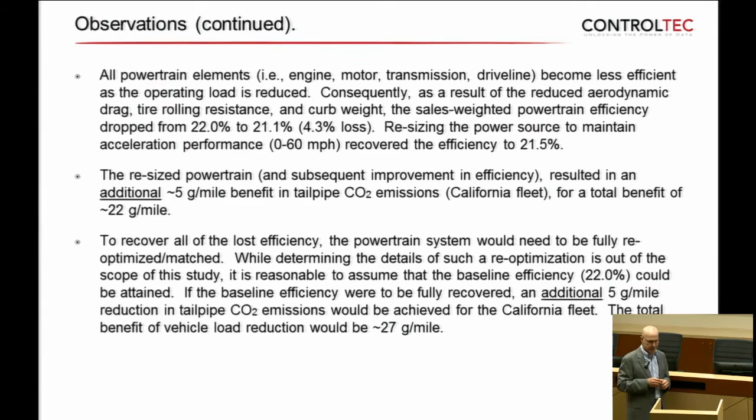So concluding all of this, bringing everything to best in class could reduce the overall vehicle load by 10%.

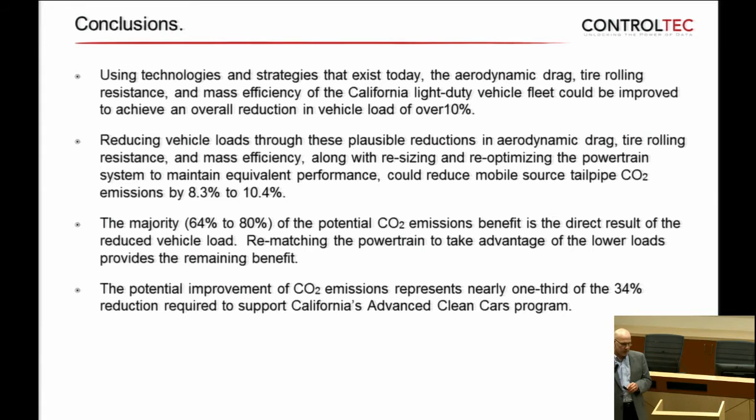That's again re-optimizing or adding plausible levels of aerodynamic drag, tire rolling resistance, and mass efficiency, resizing and re-optimizing the powertrain. That would yield anywhere between 8.3%, if we did not fully re-optimize the powertrain, to 10.4%, fully optimizing the powertrain. The majority of this potential is the direct result of vehicle load, 64 to 80%. Optimization and resizing of the powertrain is the remainder.

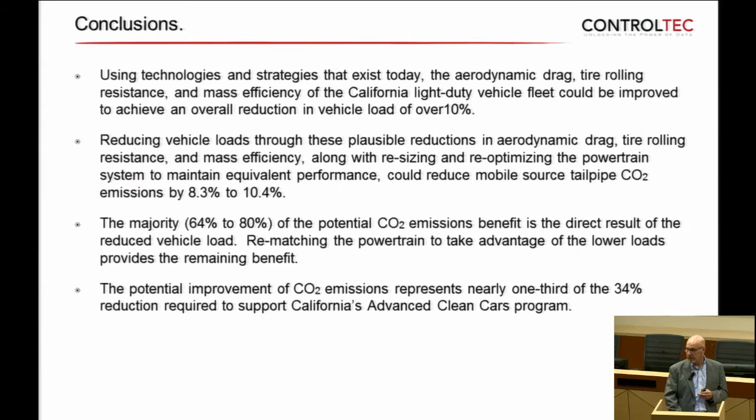What does this mean overall? 10% represents about a third of the total reduction that is being sought in the California Advanced Clean Cars program. And with that, I can take questions.

Oh, you want to give it to him? Oh yeah, go ahead.

Okay, this question comes from John German at ICCT. The B coefficient does not have any physics-based relationship to tire rolling resistance or CD. Further, the B coefficient varies widely from vehicle to vehicle, from small or even negative values to very large values. How did Controltec decompose the B coefficient into tire rolling resistance and CD?

Okay, so the short answer is, from a physical standpoint, the B coefficient represents the change in force with speed. The C coefficient represents the change in force with speed squared. So tire rolling resistance, its most important term is the A coefficient, static, but it also has a very strong speed coefficient to it, and this is well recognized. So the B coefficient is actually a relationship in tire rolling resistance.

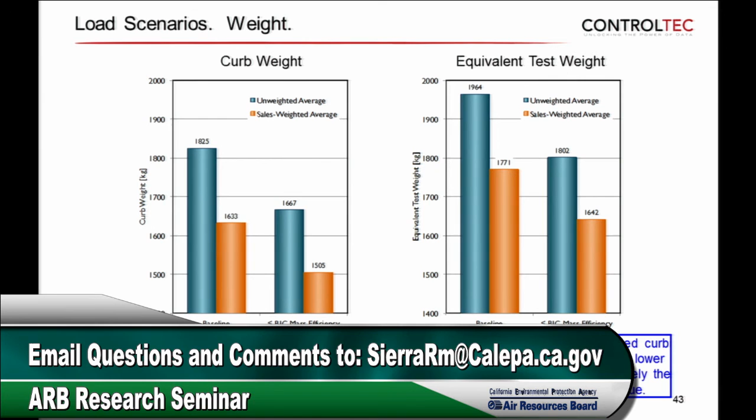Hi, this is Kevin at the California Air Resources Board. I was wondering how amenable are your analyses for doing different drive cycles that might reflect more real-world acceleration, maybe more aggressive acceleration, more idling, more traffic?

Yeah, good question, because it does change the results for sure. And the simulation model that we use, as long as we have the drive cycle from a 1 second interval, it actually doesn't have to be 1 second, whatever time trace you have. If you have grade on your drive cycle, it takes in grade as well. So what we actually ran, but don't show in the report, is all the cycles - all the regulated cycles. So we did run the US06 and the SC03, we did run the NEDC, we did run the JC08, which is used in Japan, and we did run the World Harmonized Cycle, all four. But if California had a California driver cycle, we could certainly load it in and run it.

We have an interpretation - if you're familiar with Consumer Reports, we have an interpretation. We don't know their cycle exactly because they don't publish it, but we have an interpretation of it, and we run that as well. Our results correlate pretty well to their results. Does California have a California driver cycle? Okay.